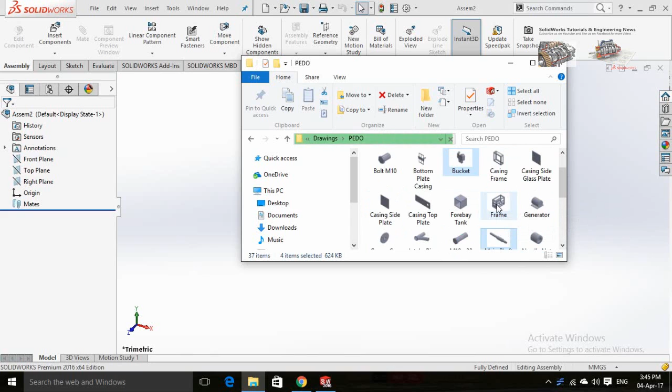Press and hold Ctrl key and select multiple items one by one. Now drag them into the SolidWorks assembly.

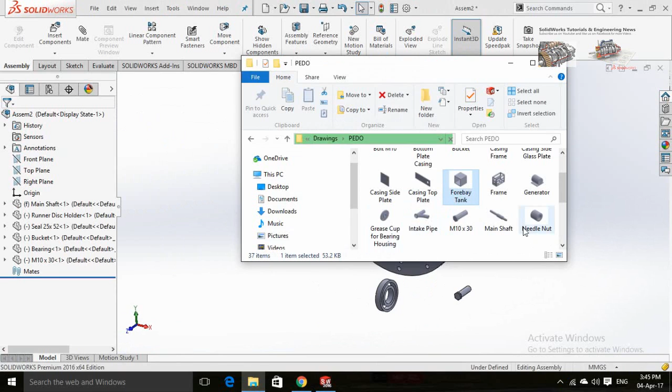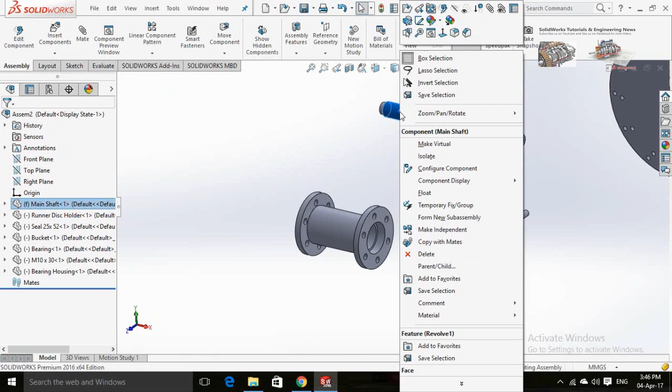As you can see, I am trying to move the shaft, but it is fixed. So right click on it and then click on float. Now right click on the bearing housing and fix it. Click on the cylindrical face of shaft and select mate, and then click on this cylindrical face to make a mate.

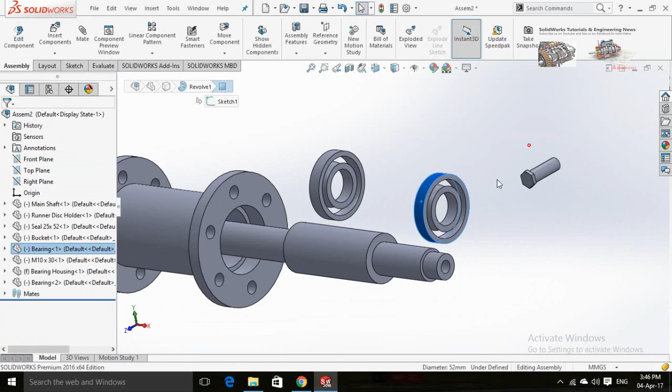Click on OK and press and hold Ctrl key and drag the bearing to make duplicate. Now click on this cylindrical face of bearing and select mate with the cylindrical face of shaft. Same process for the other bearing. Press OK.

Now create a mate for this face of shaft with this face of bearing. Same process for the other side of shaft with the other bearing.

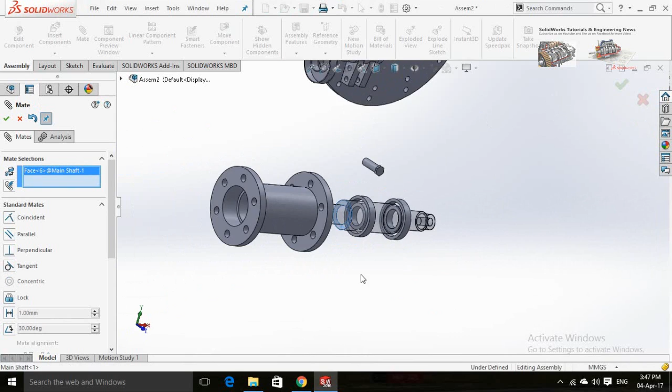Now create a mate for this face of bearing with this face of bearing housing.

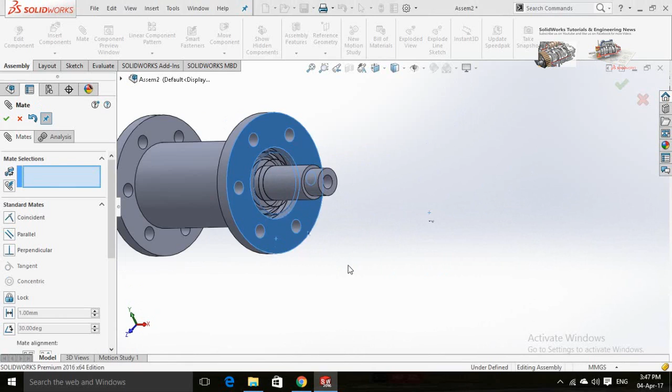Mate the cylindrical face of the seal with the bearing housing. Align the bearing housing with the seal by mating them.

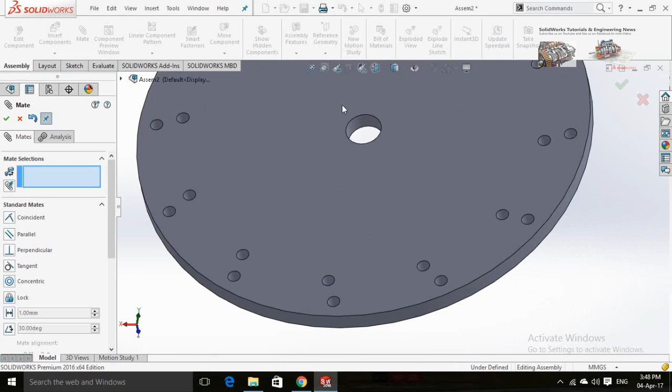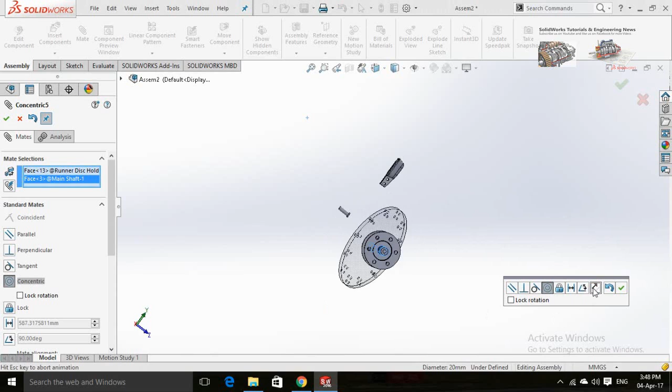If you found it opposite, change the direction from here. Lock the rotation by checking into this box.

Now align the disc at the end of the shaft by mating this face of shaft with this face of disc.

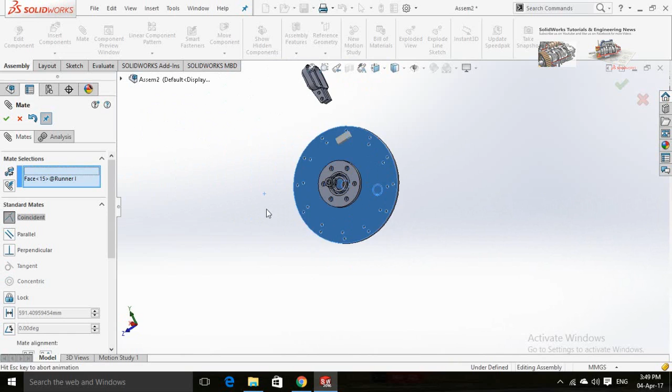Press OK button and drop the runner washer from the folder. Assemble it with the shaft and disc.

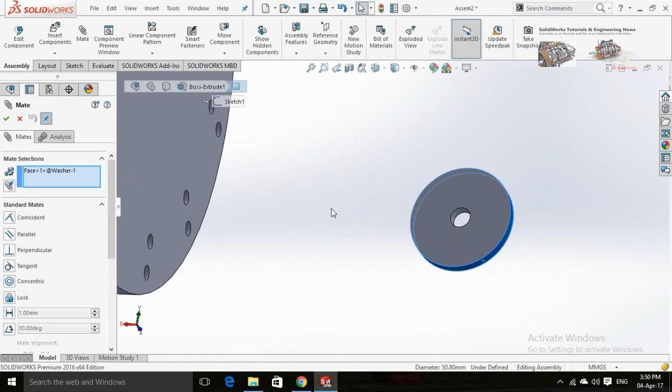Same process for the bolt.

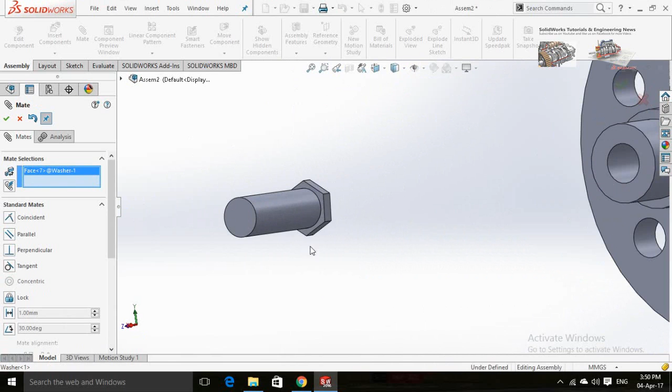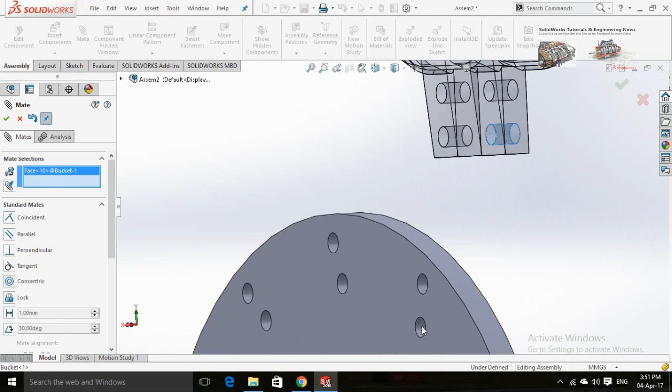Mate this face of disc with this face of bucket. Match both of these holes with the disc holes.

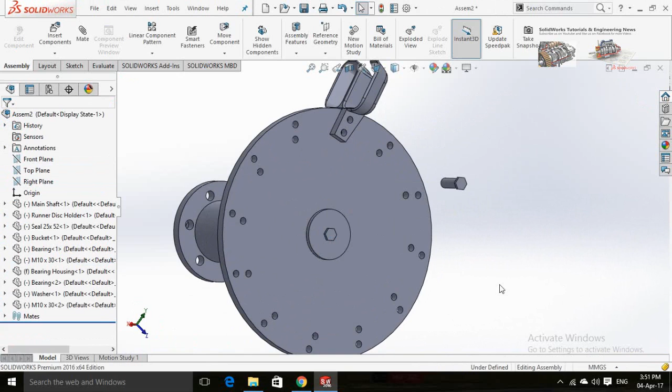Press OK and make a duplicate of this bolt. Mate it with the bucket hole.

Create another duplicate for this bolt. Assemble it with the other hole of the bucket. Now align them properly.

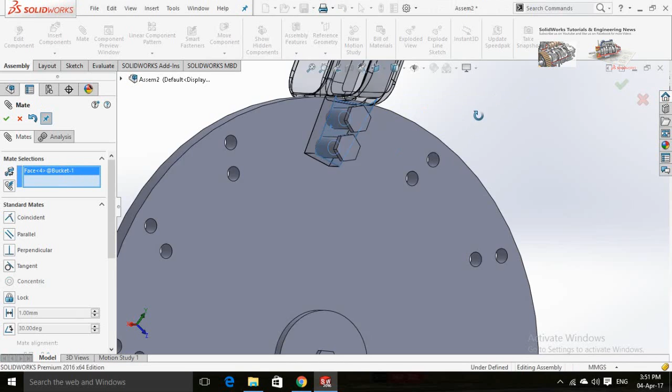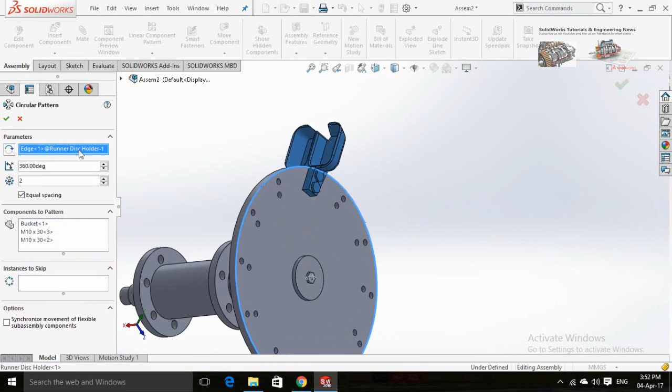Press OK and then click on the arrow below the linear component pattern and select circular component pattern. Now select the bucket and both of these bolts, then click on this box and select this circle as the pattern axis, with quantity 12. Now press OK.

You can rotate it to verify.

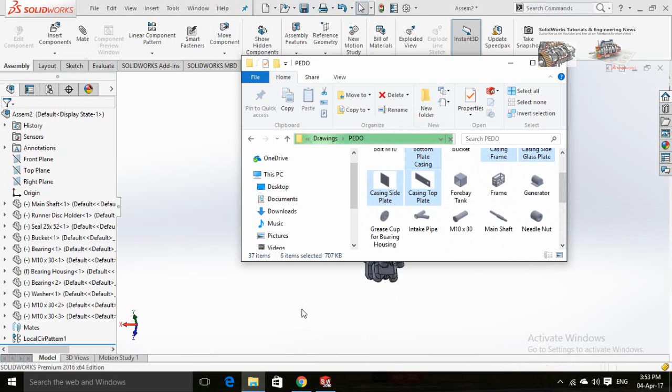Now drop the casing frame along with the side plates in the assembly. Drag them away from each other.

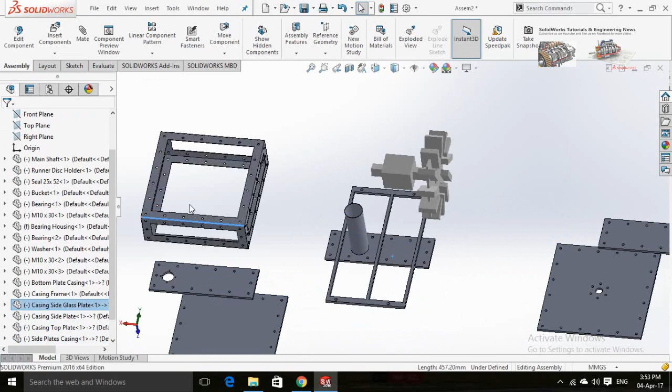Assemble this plate with the bearing housing.

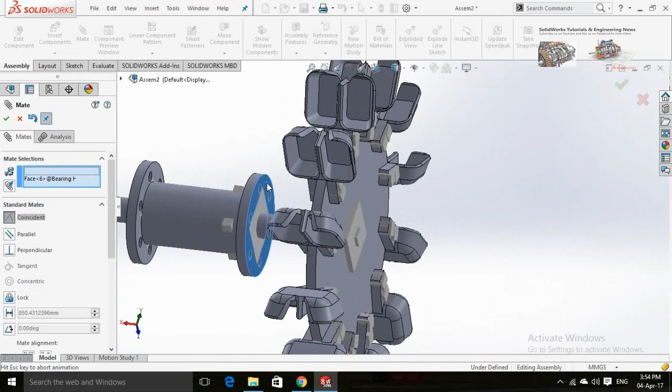Now the casing frame with that plate.

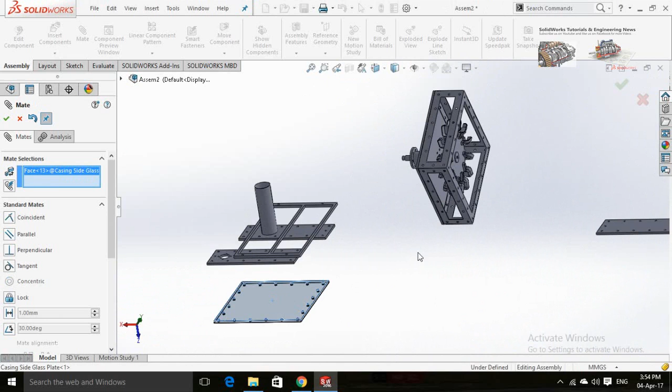Assemble also the rest of the plates with the casing frame.

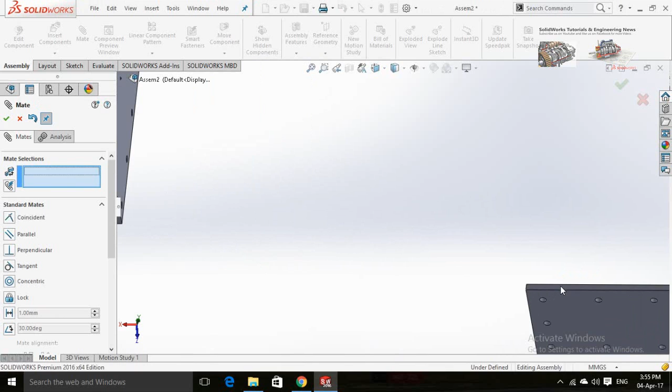If you have selected any face or edge mistakenly, right click on that and delete it.

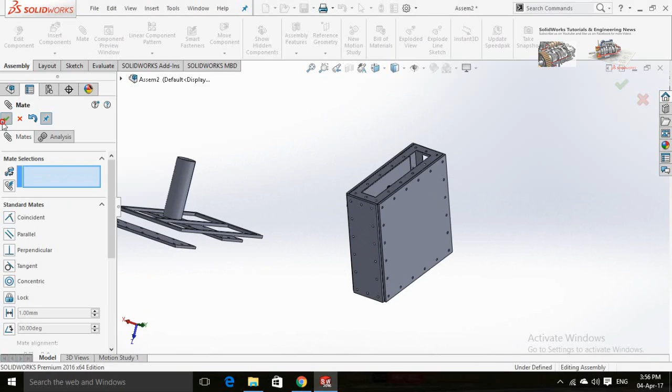Make a duplicate for this plate.

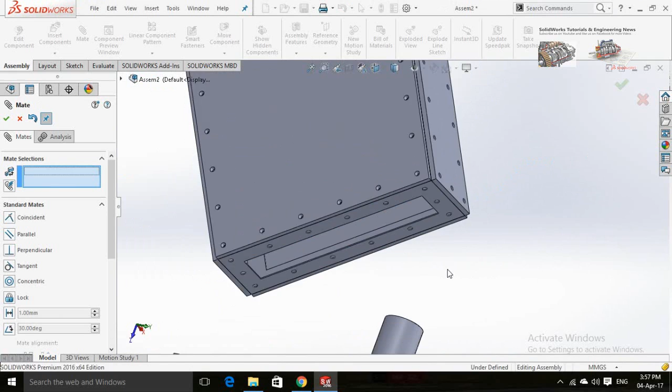Now click on these plates and change their transparency.

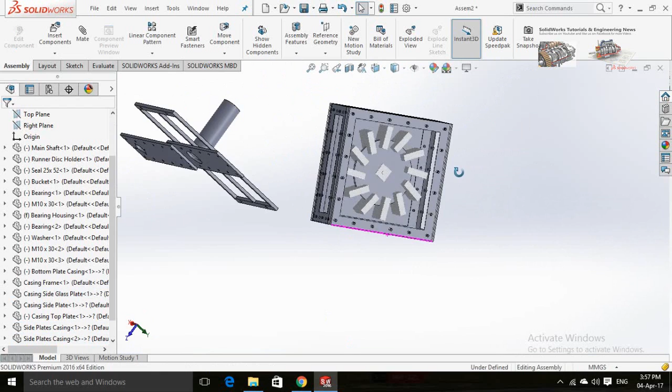The turbine will rotate in this way, so be careful while assembling this plate.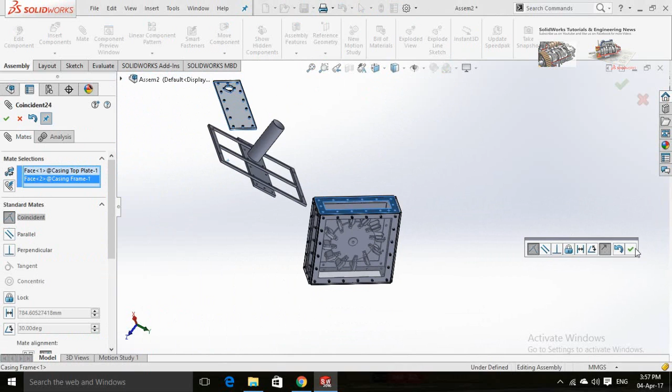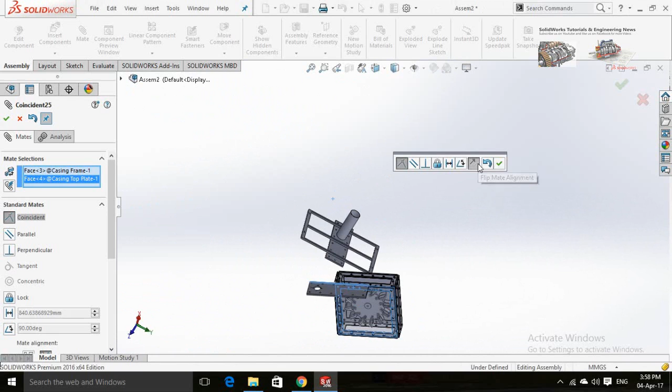The hole on that plate must be in front of the bucket instead of the back side. Change the direction if needed. In this case, we need to change the direction.

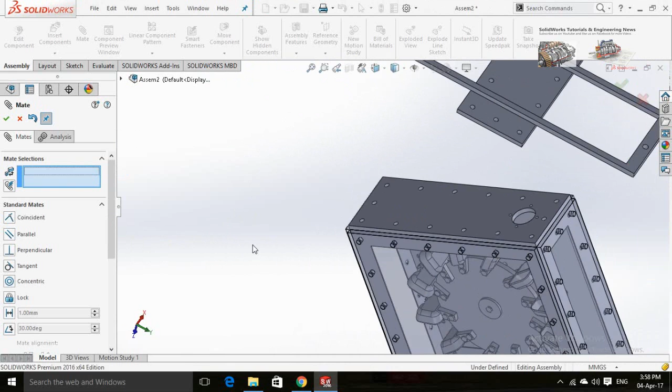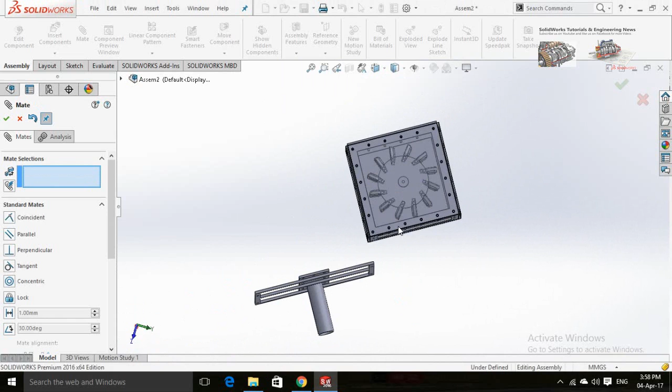Now assembling the discharge tube plate. Change the direction. Change direction once again.

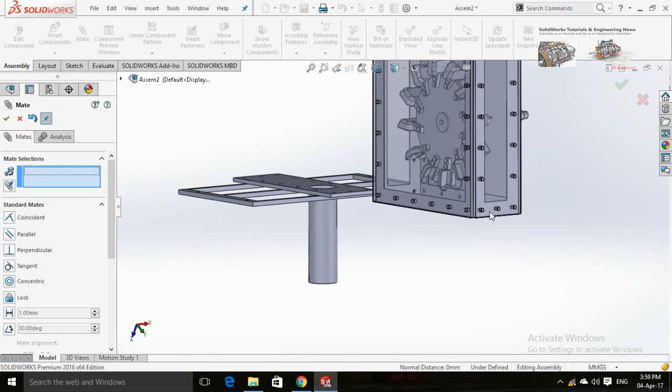Now drag the nozzle assembly here. There is another video on assembling the nozzle assembly. You can find it in the description of this video.

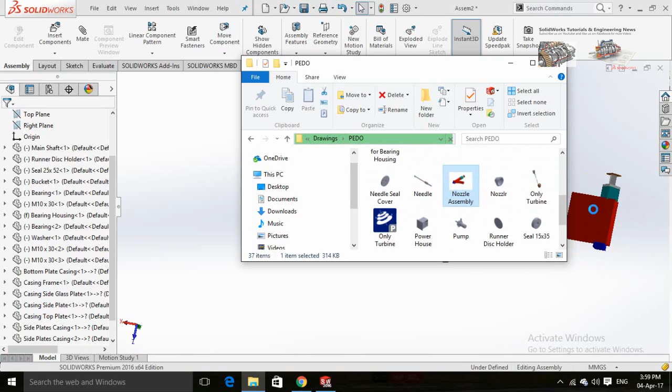Assemble this nozzle assembly with the top plate of the casing.

Set the direction of the intake adapter for the penstock pipe.

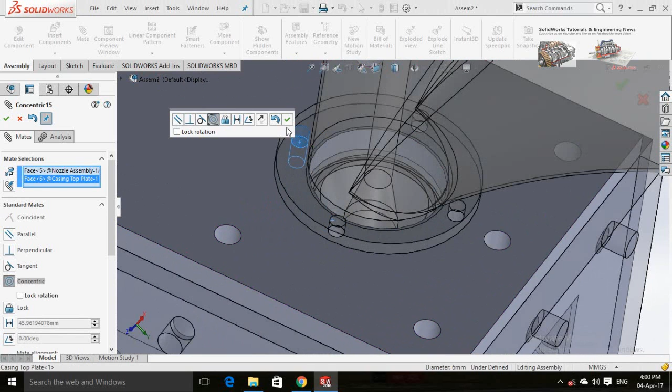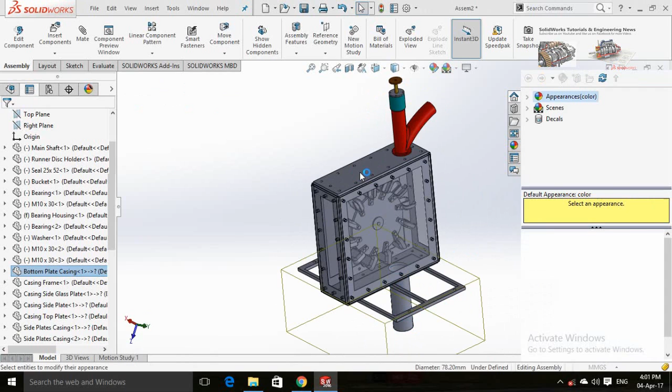Now the assembly is ready. If you want to change the appearance, click on that part and then click on the little arrow in front of the appearance button and then select the part. From here you can select any color.